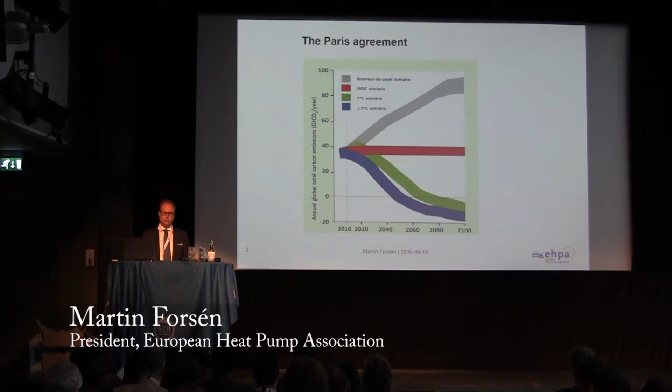And that's where we come in, because we need to reduce the greenhouse gas emissions in all sectors. Electricity generation, transport, but what we believe has been so far very much overlooked is the heating sector. And we need to address this. CO2 emissions from fossil fuels have to be pretty much phased out before 2050. We need to act now.

And this also applies to the European, and I would say even the American and many other areas around the world. We need to address the heating sector as well. And I believe that this has been very much overlooked for far too long. Every new installed gas boiler is a missed opportunity, because that gas boiler will pretty likely be in use for 20 to 25 years. We need to make the shift now.

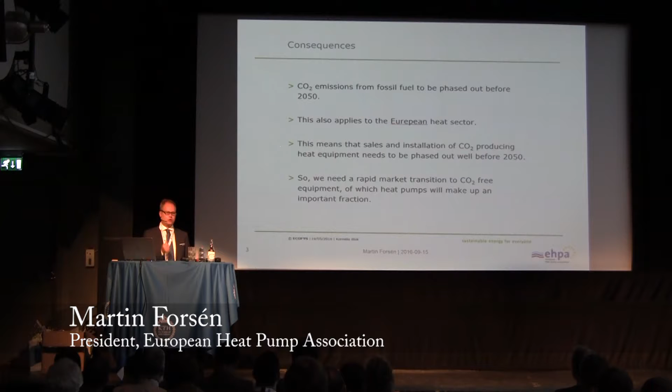It's a shift from non-condensing boilers to condensing boilers, heavily lobbied by the oil and gas mafia, as we sometimes call them. And of course they claim that this is the good way to go. This is improvement. This is CO2 emissions reduction. Yes, it is, but it's not enough. This will not take us where we have to go.

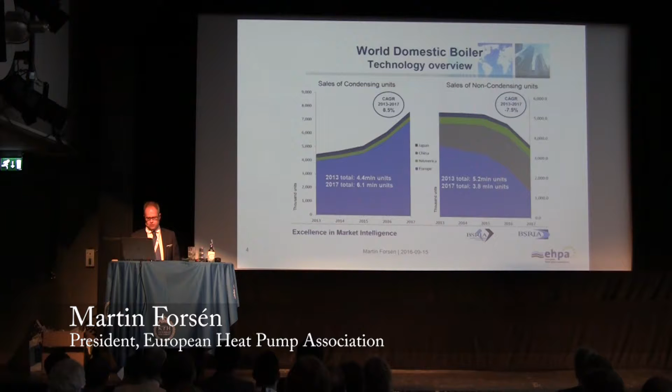And this is the reasoning for my work. What I do, I'm pretty much a lobbyist. What I do almost on a daily basis is that I have contacts with authorities, ministries in many countries, mainly in Sweden, but also with other ministries in Europe, and quite often have meetings with the Commission trying to push them in what we believe is the right direction.

And we stand for heat pump technologies. I am employed by a heat pump manufacturer, not only a ground source heat pump manufacturer. We develop, sell and market air-to-water heat pumps, exhaust air heat pumps, ground source heat pumps, and domestic hot water heat pumps, and many other different types. So we have pretty much the full spectrum. And in my position as the president of the EHPA, I really try to lobby and push for the whole heat pump market in Europe to go forward.

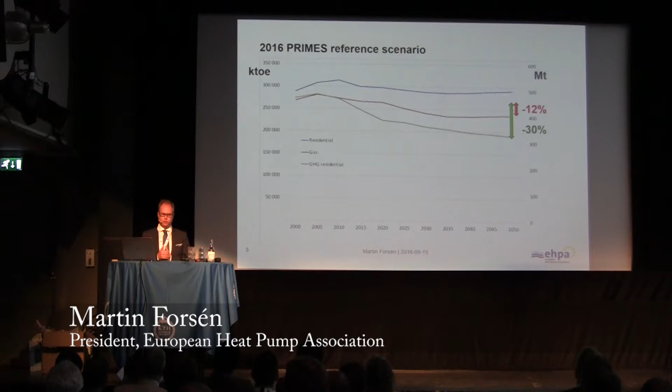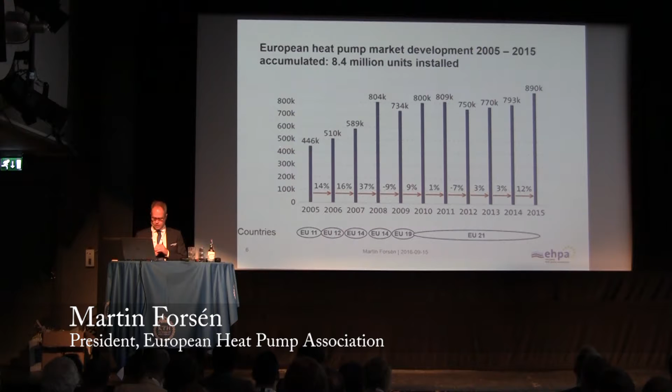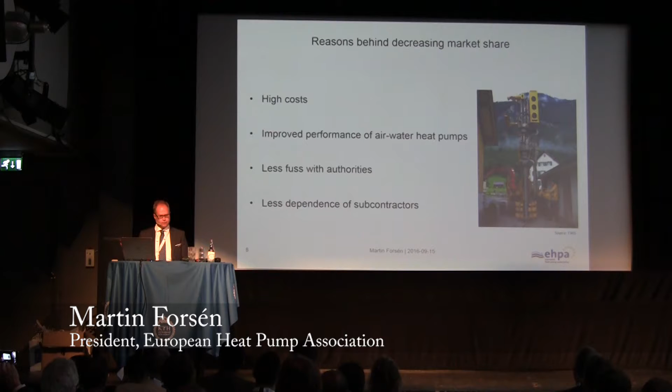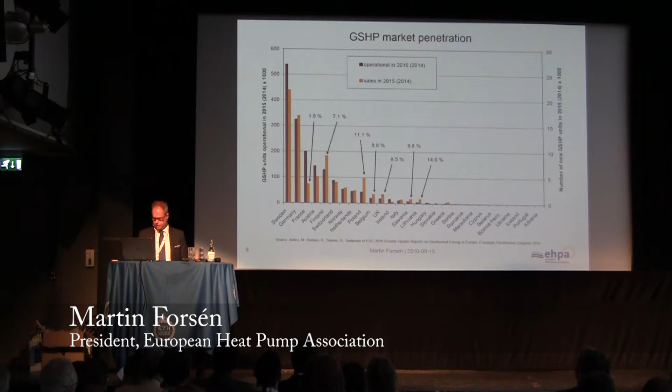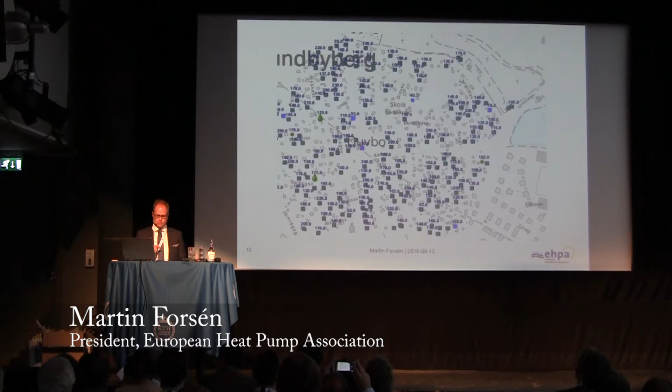And this was an area where the buildings were built around 1905 to 1920, somewhere in that range. So all these installations are retrofit installations. And to the right hand side of this picture, you see that there are no ground source heat pumps at all. And this area here is for multi-family buildings, and it's covered by district heating.

However, the district heating company in this area is using large heat pumps in their system. Not ground source heat pumps, they are sewage water heat pumps. And in addition to that, they use biomass boilers as well.

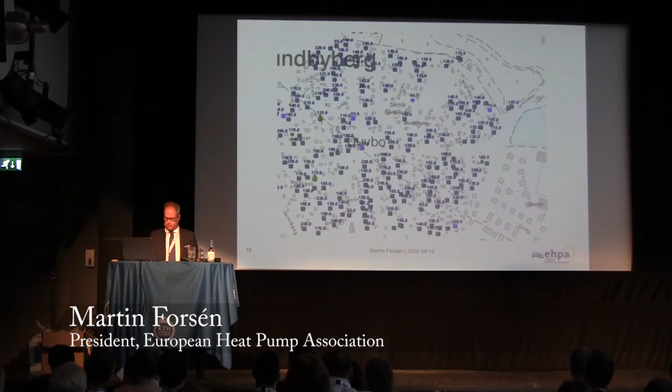So that was the broader picture and some picture of how it looks in Sweden. If we look again to the European market, I don't have time to go through each and every one of them, but I will give you some hints, some information about some specific markets here that I think is quite interesting.

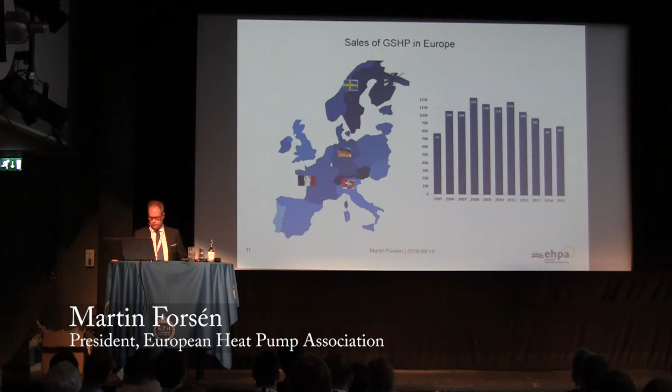What we see is that ground source heat pumps have a strong place in the market in Sweden, in Finland. It's not doing too bad, but it's losing market share also in Switzerland, Germany, and really almost a crisis in France. So I'm trying to show you these different countries here and then some hints about the characteristics that might, if we can find a reasoning behind here, explain why we are successful on some markets and not on some other markets.

And some of the reasons behind this, I think, go back actually to 1995. There were a lot of discussions on governmental level then that we need to do something to shift from oil towards more renewable options, more clean options, even though we didn't talk so much about renewable energy at that time. But we needed to reduce the dependence on oil. So then they initiated a technology procurement program. It was a sort of heat pump competition. And there were 2 appointed winners in this heat pump competition.

And from then on, when these 2 winners were appointed, the heat pump industry, actually the ground source heat pump industry, got a lot of attention, a lot of focus, and a lot of people started to work with it. So this is often referred to as the great success and breakthrough for ground source heat pumps in Sweden. And this is really quite strange, because these 2 appointed winners were 2 catastrophic products. This was not to blame the manufacturers all too much, because during this competition they changed the rules.

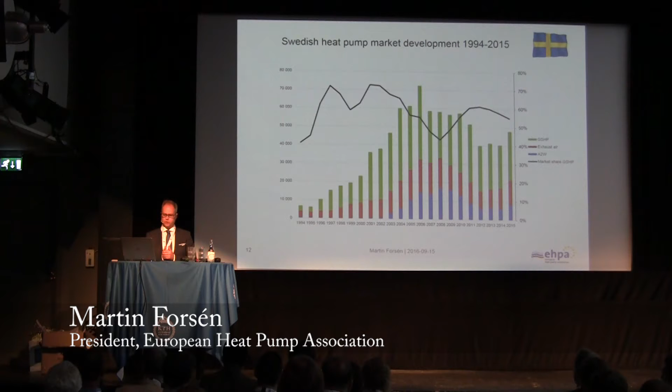For the new construction market, the story is quite different. We have a tiny, tiny market share for ground source heat pumps in new construction of single-family houses. The heating demand for these houses is much lower, and a ground source heat pump application is in many cases seen as too expensive. However, the market share for ground source heat pumps in new builds is increasing at the moment in Sweden.

And as you see, this is also quite a dramatic drop in Germany for the market share of ground source heat pumps. Right now, we are seeing a recovery for ground source heat pumps in Germany, however. And this is, I'd say, pretty much only caused by an existing subsidy scheme that was put in place last year in April to give some extra promotion for ground source heat pumps.

As a private household owner, you can get as much as 4,000 euros, which is a tremendously high amount of money to subsidize your ground source heat pump installation. Otherwise, what is cutting us back is that the market in Germany is very differentiated depending on which area in Germany you are. Some areas are quite liberal, where you can get your permit to drill fairly easily. The geology in some areas is bearable, whereas in some cases it is very difficult to drill.

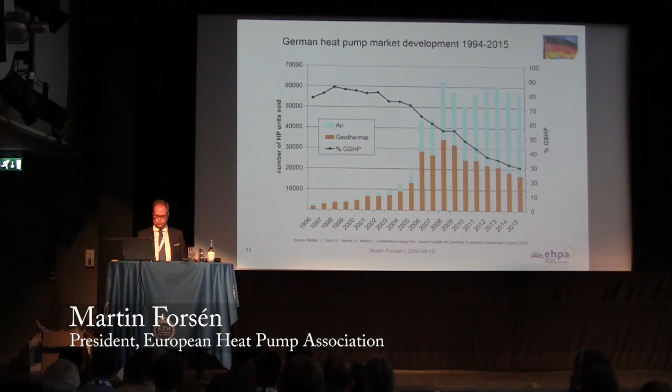So the cost for drilling in Germany varies dramatically. The average price for drilling in Germany at the lower end would be 35 to 40 euros, and it goes up even to 100 euros per meter. But if it costs 100 euros per meter, it's pretty much a no-no. It's really difficult to justify such high cost. What could also be worth mentioning is that in new builds, heat pumps, taking into account all the different types of heat pumps, have a market share of 34%, which is quite good.

Then if we have a look at the market in Switzerland, Switzerland being a fairly small country in Central Europe, I guess most people have the impression that this is an expensive country. And it is also when it comes to heat pumps. But still, the market is fairly stable. But even in Switzerland, we've seen a shift towards a higher and higher market share for air-to-water heat pumps and a diminishing market share for ground source heat pumps.

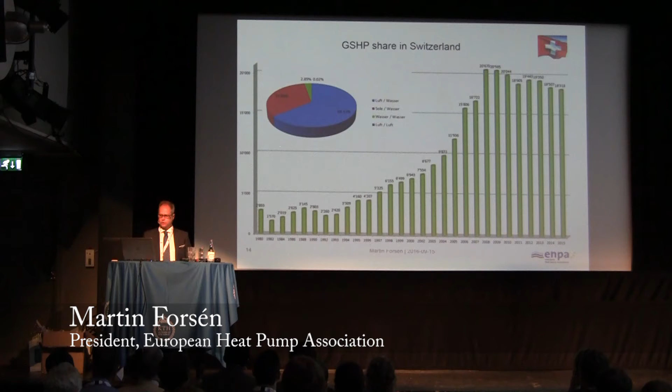Some cantons in Switzerland are offering subsidies for heat pumps, but in most cases they also offer the subsidy for air-to-water heat pumps. So people tend to go for air-to-water heat pumps on many occasions. However, there are some areas where ground source heat pumps are much preferred, located in the colder parts of the Alps. And then we have the good and promising country, our neighboring country, Finland.

And the reason why these are sold in such high numbers in Finland, in Sweden, and in Norway is that in these countries we've had for a very long time, and still have, a fairly high market share for direct electricity heating. And for these houses, this is the most cost-effective way to reduce your energy bill. If you install a single split air-to-air unit, the payback is less than 3 years, even 2 years in some cases.

However, when it comes to new construction, it is quite amazing that in Finland, our neighboring country, ground source heat pumps... in Sweden I mentioned that ground source heat pumps have a very tiny market share for new builds, whereas Finland is the #1 country in Europe, and I'd say probably in the world. It has a market share of 53% for new builds in Finland.

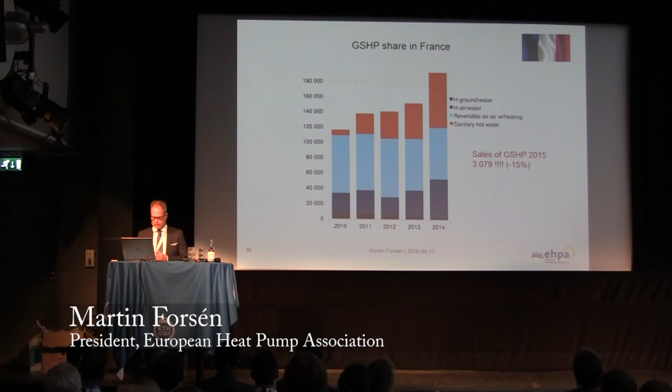So if we look at Sweden first, the price of such an installation is, to our estimates, probably the cheapest one in Europe, mainly due to the fact that we have the cheapest drilling cost. We have a tiny market share in new builds, but the strongest market share when it comes to retrofit installations.

Then we have France, where there are hardly any installations being made in new builds. It's all going to the retrofit market, and for slightly larger buildings where you can justify the investment. It is one step more expensive than in Sweden due to higher drilling cost.

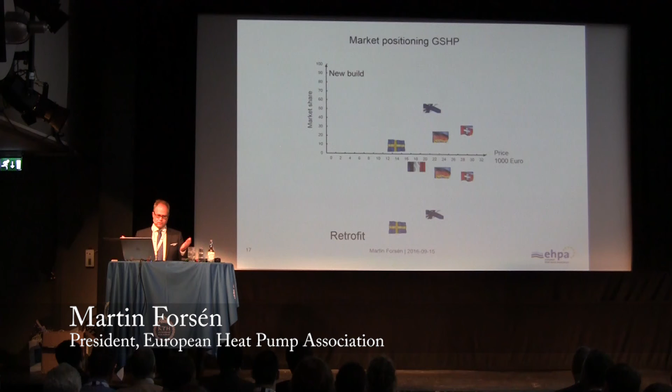And then we have the high premium market, which is Switzerland, where the cost for these installations is tremendously high, but everything else is also tremendously high in Switzerland, so they seem to accept these prices anyway. The market there is fairly stable.

Just finishing up here, if we are to pick some common success factors for ground source heat pumps, at least here in Europe. I know it's a different story in the US, but we don't have that much air-based heating, ducted air systems, for our heat distribution. We have hydronic heating systems to a great extent.

And in the areas where you introduce underfloor heating, which is a tremendous trend, and a great majority of all new builds in Sweden, Finland, Norway have pretty much underfloor heating, which raises the opportunities to reach a high efficiency for these installations. Larger heating loads, then of course it makes sense for a higher investment. If you have liberal drilling regulations, that's also beneficial for us.

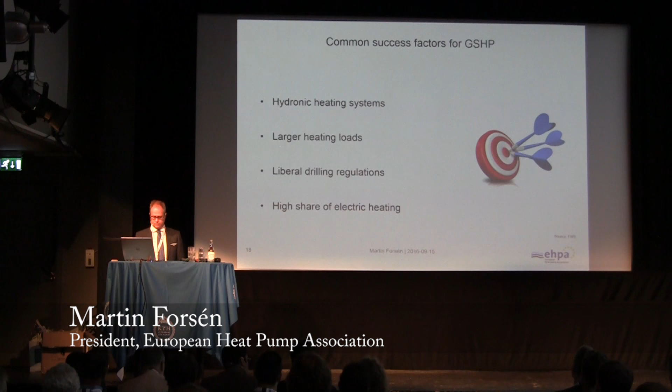And with that, I think I really have to stop my presentation so that I don't entirely destroy the agenda for today.

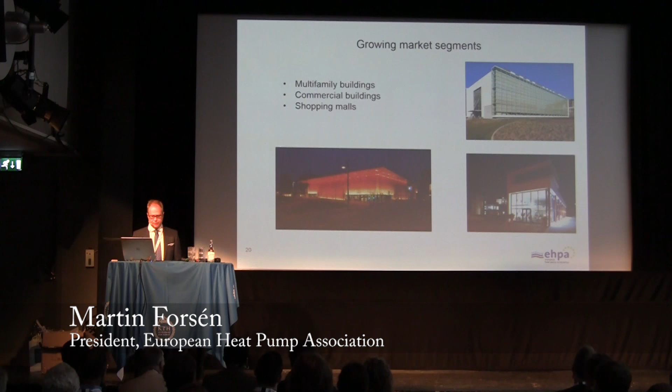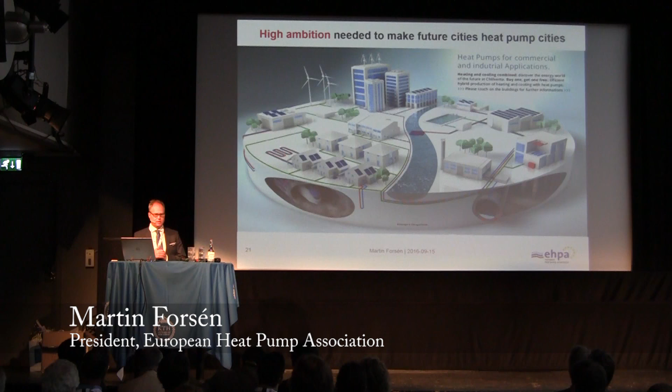Just finish off with this picture, which I realized looked pretty much like the picture Björn Palm showed. This is the future that we would like to see, the smart cities of the future. And we see that heat pumps will play a very important role as integrator of all these renewable energy technologies in the future. I'm not skeptical, I'm convinced that heat pumps and ground source heat pumps have a great future ahead of us.